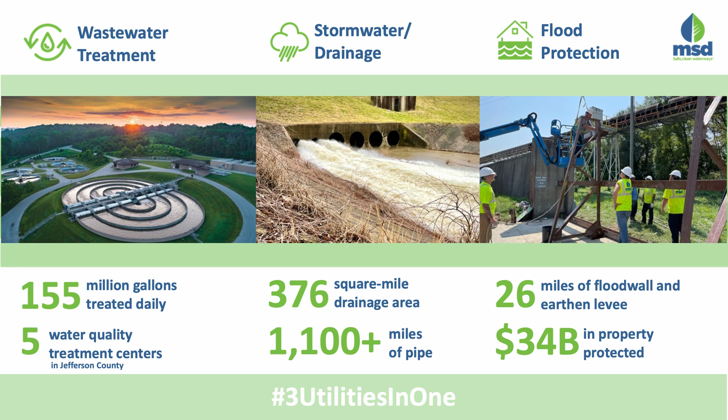For flood protection, we manage 26 miles of earthen levee along the Ohio River, and 16 major flood pump stations. We are currently trying to replace those 16 flood pump stations, and a lot of work has already started at the Paddy's Run flood pump station here in West Louisville, a $230 million project that is just now under construction.

During tonight's presentation, you have a couple of opportunities to participate. You can submit a report of an odor in your community, or if you have a specific issue, you can let us know about it using the blue form that was given out to you. We have a team of folks here to have this discussion with you, answer your questions, or assist you.

If you have a question relative to odor and the information we are going to present tonight, you can submit that to our team as well using the green form. So you should have either a blue form or a green form depending on what you want to do. If you just want to report an odor, you have the blue card. If you want to ask a question relative to odor or what we present tonight, you should have a green card.

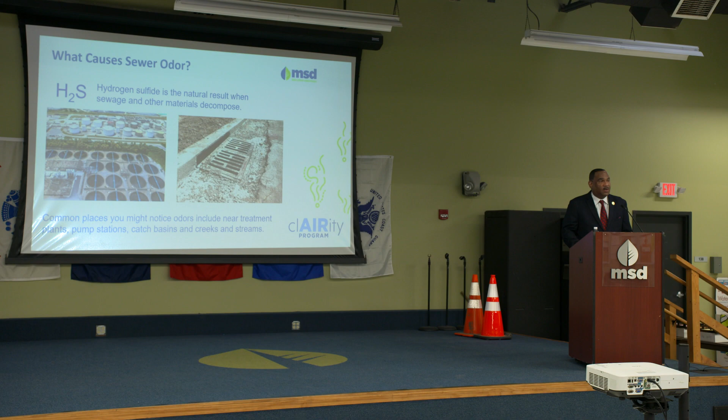So I want to talk about our industry, what causes odors in a sewer system. One of the most prominent odors that comes out of the sewer system is called hydrogen sulfide. Hydrogen sulfide is the natural result when sewage or other materials decompose in the system.

Common places where you may notice odors: it may be near a treatment plant, near a pump station, or near what we call catch basins—we'll talk a lot about catch basins in a minute—or near creeks or streams.

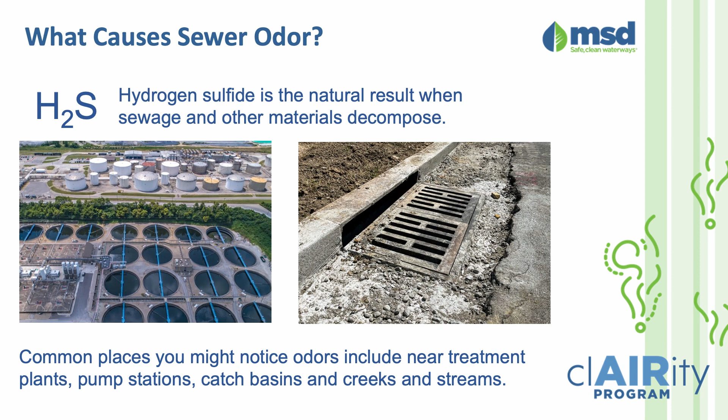We can only talk to you about what we know, and we know that we are not the only odor in town. We know there's a lot of odors in our city, but anything relative to the sewer system, we know what it is and how to respond to it. But we do not know how to address odors that may be coming from a manufacturing facility, an industrial plant, or a restaurant or something like that.

So when we get information from you that there's odors, we need to know as much specifics as we can so that we can identify where that odor is coming from.

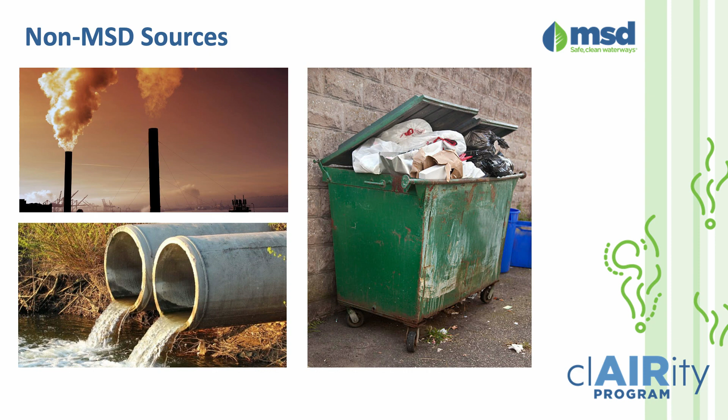We do know that there are what we call non-MSD sources of odors, and we work every day to address those within our system. We also know that there are private industries that contribute to odor as well, and as we control what comes into the sewer system, we also work with our industries to try to control what's being discharged into the public sewer system.

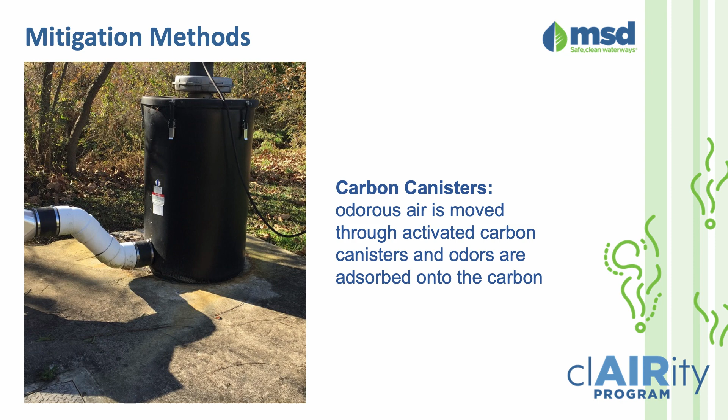We use a variety of methods to mitigate odors in and around our facilities. For small air streams, we use what's shown on this slide, called a carbon canister, usually installed on manholes or pressure relief valves when there are odors from those areas. These are mostly at our smaller pump stations, used to hold onto the odor-causing compounds as air streams through them, mitigating odors locally at certain parts of the system.

At some of our larger pump stations in the collection system, we use chemicals to prevent odors.

A common remedy that we use in our pump stations is called bioxide, a non-hazardous chemical that is commonly added to wastewater for odor control. It also creates an opportunity for the bacteria in the waste stream to thrive, so that it is actively consuming and dissolving odors.

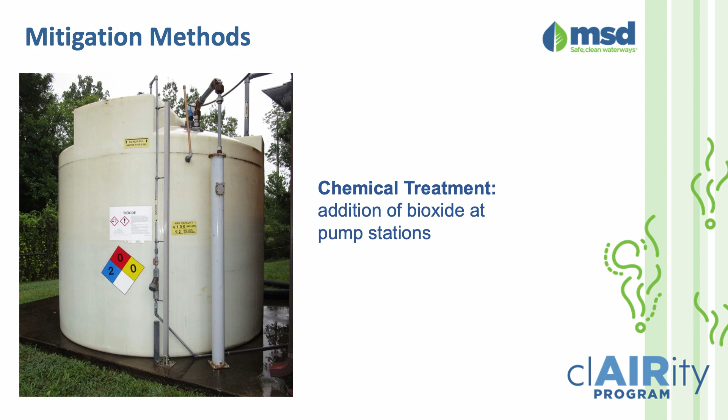One thing I'll say about some of the chemical treatment we do in our system is that it is very expensive. We're looking at how we can not only improve or expand the number of chemical additions in our system, but also other remedies throughout the system.

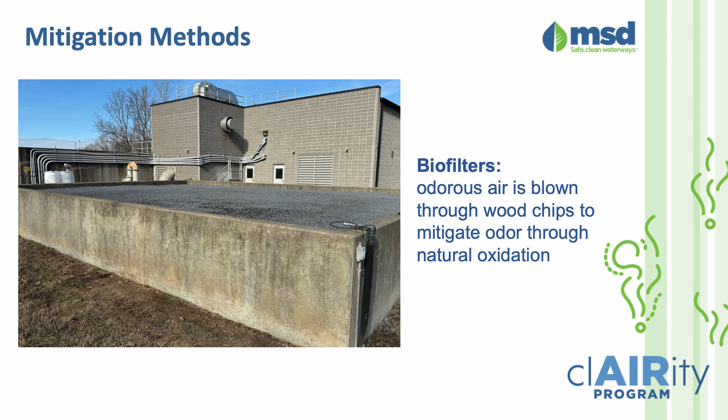Other mitigation methods are what we call biofilters. Biofilters are a very simple treatment process where we exhaust the air through wood chips or large pieces of mulch. As the air goes through those pieces of mulch, the bacteria that's created there consume the odor compounds coming off of such a facility.

We also use biological scrubbers. These are very large systems that we use, and they're very complicated and expensive to operate. There are a lot more moving parts than biofilters and other things involved, because inside the vessels, in the bed of media and living on the media, we have other compounds that help absorb the odors as part of the odor treatment process.

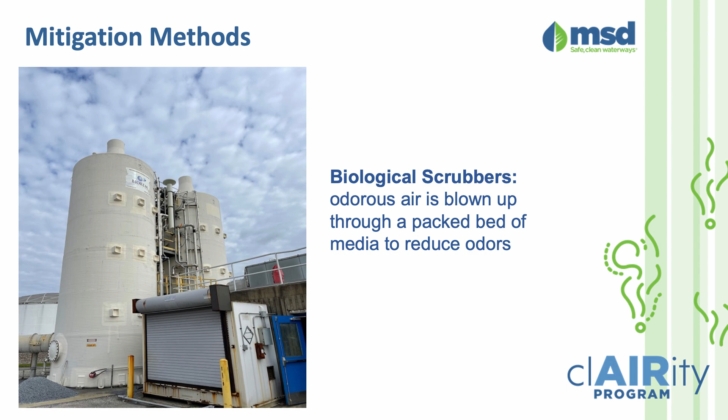So you've got 3 or 4 different methods that we are using currently with our operations every day. Whenever we identify issues, there's the use of chemical treatment as part of our collection system to help reduce the amount of odors that can generate within the sewer system. So when people say, well, what are you doing? This is the stuff that we're already doing, the stuff we do every day.

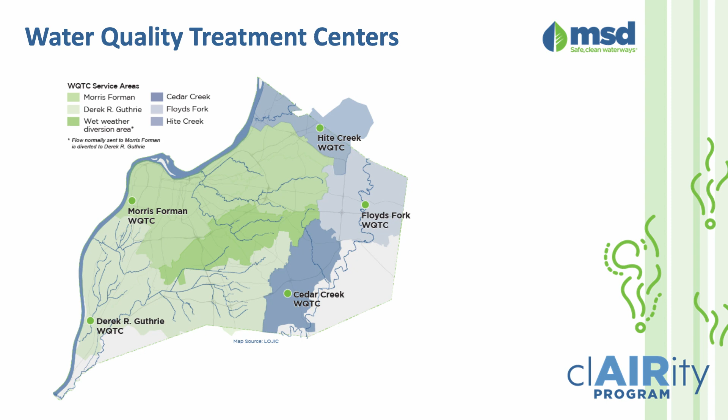We talked about the treatment plants. In Louisville and Jefferson County, we have 5 major treatment plants and 5 different watersheds. The Morris Forman treatment plant here in the West End is the largest watershed we serve in Jefferson County. It has a facility that was built in 1958, the largest and oldest in the state of Kentucky. On a normal dry day like today, we treat about 90 million gallons a day, and during a rainy period, we can treat up to 350 million gallons a day, almost 4 times the average daily dry weather flow.

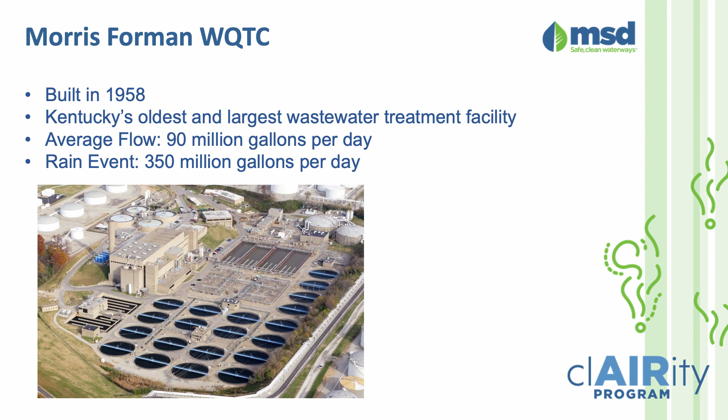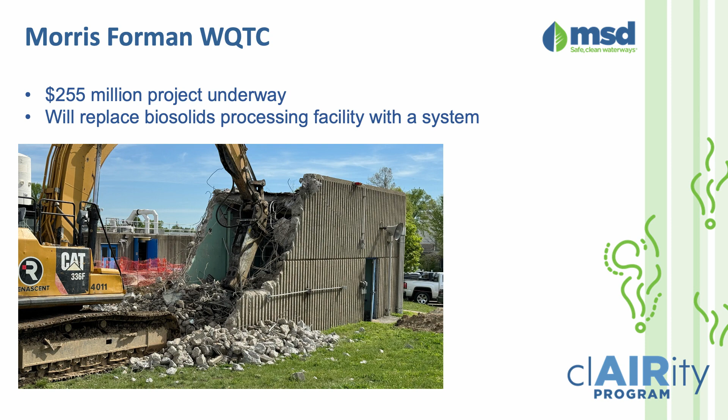At Morris Forman, we have already initiated construction to replace our biosolids handling system. That is a $255 million project, and as part of the scope of that project, there's approximately $12 million allocated to odor improvements on the Morris Forman property. That project is a design-build project, and it will take some time to complete, but it's already in our budget, already initiated, and expected to be completed by the end of 2026. That's how complicated that project is, but it has scope specific to odor reduction at the Morris Forman treatment plant.

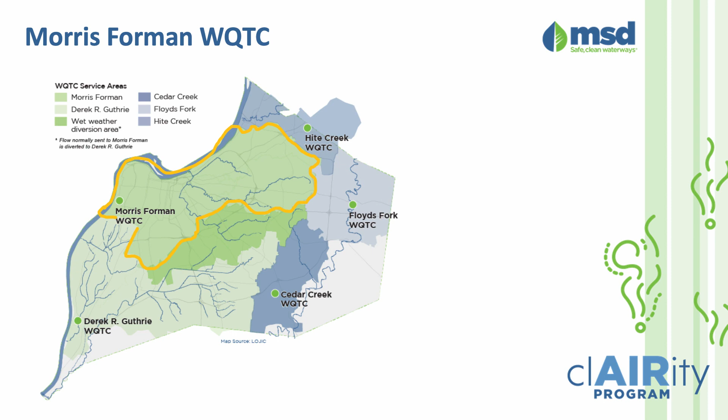When we talk about a combined sewer system and the rainwater, that rain or drainage enters into the system through what we call a catch basin. The catch basins were designed to take on rain during a rain event, and as that goes in there, the way they were designed at the time, if the rain event was too much, the sewer would overflow.

We had designed overflows in the system, which we are currently under federal order to eliminate because of the change in the Federal Clean Water Act. So we have spent well over $1 billion eliminating overflows in the combined sewer system, and we just completed our last combined sewer overflow project. You probably heard us talk about a deep tunnel that ran from downtown Louisville out to I-64 in Grinstead. That was a $230 million deep tunnel project that we just completed.

Now our focus is on doing the work within the existing system, at our treatment plants, and at our pump stations. 85% of our current CIP, our capital improvement budget, is tied up in existing federal consent decrees or state agreed orders to address either upgrading the system or coming into compliance with the Clean Water Act. So think about that - 85% is already allocated. It doesn't leave very many residual funds for us to deal with immediate needs or emergency needs in our system.

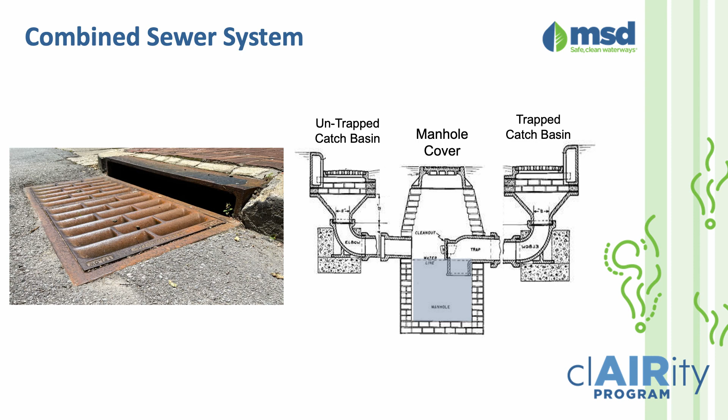What a catch basin does is it basically takes on this flow, and you can see there are two types of catch basins - some designed with what we call a trapped mechanism and some that are untrapped. Inside the 264 loop, we have about 20,000 catch basins, and about 12,000 of them, back when they were installed, were untrapped. When a catch basin is trapped, there is a water line in the catch basin. The water line prevents odors from coming out of the sewer system and out the catch basin. So out of the 20,000 inside the 264 loop, 12,000 of them are untrapped.

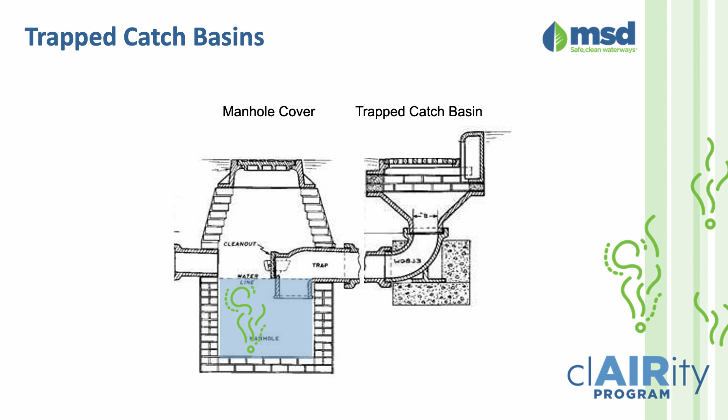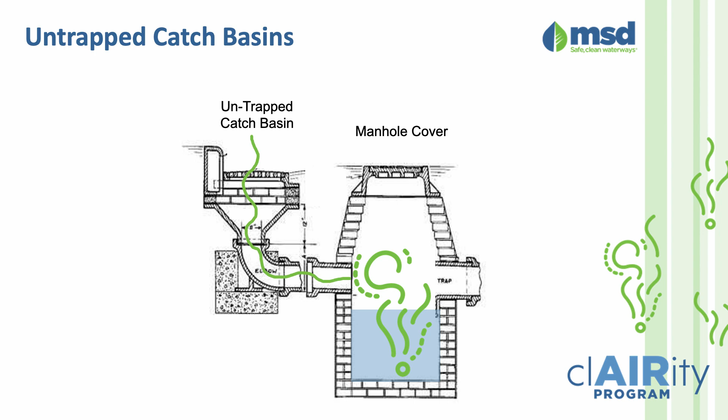So the odor stays in the system when you have a trapped catch basin. Fortunately, not all 20,000 of them are untrapped, so we're able to go through now and inspect and assess those that need either replacement or upgrading to make sure they are trapped, so odor cannot get out through a catch basin. An untrapped catch basin does not have the ability to have a water line within it to keep the odors from leaving the system.

So what we have to do is go in, and when we get a call, our crews - a lot of them are standing out here amongst you today, Tony Woods is one of them, throw up your hand Tony - Tony and others respond, and the first thing they do is figure out where the odor is coming from.

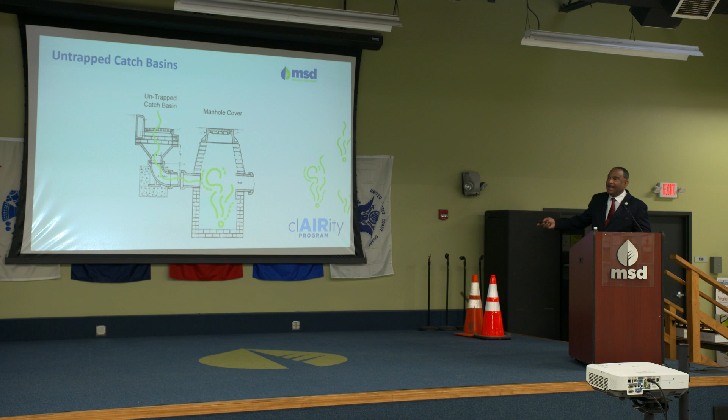And if it's coming from a catch basin, and they figure out that it's untrapped, the first thing we try to do is get water into the system. We try to get water into the catch basin, or we flush the system, and then secondly we deodorize that system. That's what our crews are doing every single day during the summer, particularly during a long, hot, dry period. So when people ask us what we're doing, these are the type of things we're doing - we're responding, and we're either flushing or deodorizing these systems.

I talked about rainfall, and this is fact - we have experienced a long period of drought, and I just saw a news report yesterday that this summer is expected to be a long, dry, hot summer. That's not good news for us because we know there's going to be challenges if we're not getting the rain that we need to flush out those combined sewer systems.

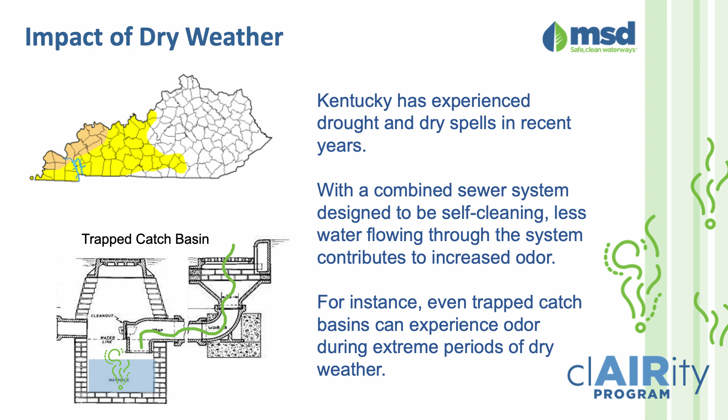With the combined sewer system, if it was designed in the 1800s to be self-cleaning and you're not getting the rain to flush it out, you have that residue within the system that is decomposing, and that's what generates what we call H2S. Ultimately, without the trapped catch basins, that's one part of the system where odors are getting out, and that's why we've put so much focus on that. We know particularly in areas where we have hotspot areas or complaints, we need to assess the catch basins first, and we need to make sure we have those conversations.

We need to make sure specifically from the community, what are you smelling? Because once we know what you're smelling, we can determine where that odor is coming from, whether it's coming from outside or from inside—there's also internal plumbing issues we need to talk to you about as well.

What our crews do, in addition to flushing the system through with our existing Vactor trucks, is partner with the Louisville Water Company. When they flush fire hydrants, we coordinate with them to make sure they are flushing those hydrants in parts of the city where we are getting odor complaints.

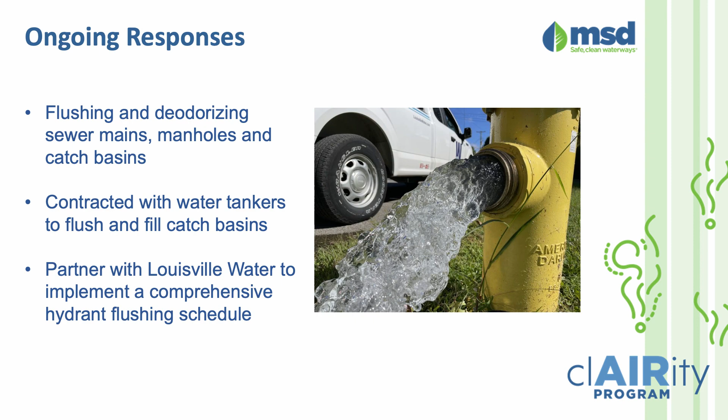Secondly, we contracted last year with water truck tankers so we could direct and send water trucks and tankers into areas to introduce and get water into the system. We're going to do that again this summer. In fact, we're getting ready to do a bid to contract with more providers to help us get water into the system. Also know that we're not getting the flow from normal residents and businesses as we did.

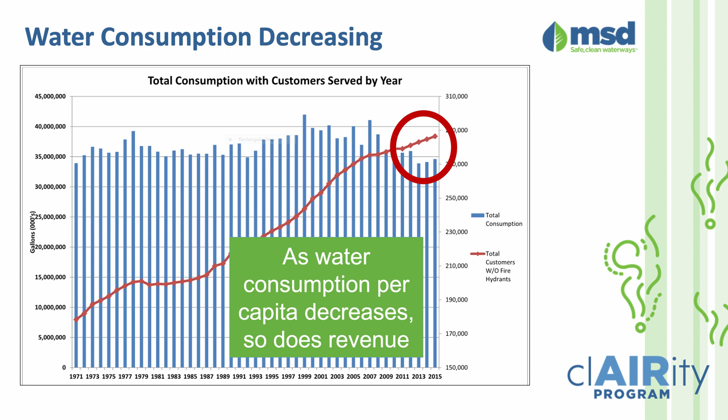This graph shows that even though the population of our city is almost 2 to 3 times higher than it was in 1960, the blue line shows the total consumption on an annual basis. You can look at 1971 versus 2015—even though the population has increased 2 or 3 times, we're not getting that additional flow with the growth of our city. So with a combined sewer system, even though the city is bigger, we're not getting the flow from residents and industry, and we're not getting the rain we would normally get to flush the system.

We have a double-edged sword: we are not getting the flow to flush the system out, particularly during dry, hot summer periods. And that, my friends, is the primary contributor to why you have odors in the streets and in the collection system—the lack of water usage and the lack of rain. That's factual. No matter how anybody else wants to spin it, that's factual.

We've had folks tell us, why can't you just have the water company flow more water into the system? Or why can't you just put a pump in the Ohio River and put water in the system? We have 20,000 different catch basins inside the 264, and 50,000 manholes across Jefferson County. You would spend more money building a system to pump water from the Ohio River to address odors than you would doing what we are doing right now. So we have to be rational and factual about what the issues are, and what the short-term and long-term fixes are.

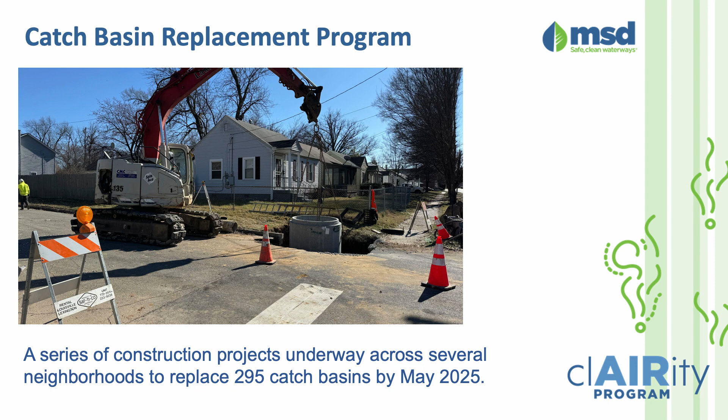When we talk about our catch basin replacement program, we already have a series of construction projects underway across several neighborhoods. So far we have 295 catch basins that will be done by May of 2025, and the majority of those that have already initiated construction are wrapping up this May.

In the Shawnee neighborhood, we actually had to rebid that project three times to get bidders, and we had to package those together to get a bid. But now that we have bids, that work will be wrapping up in the fall of 2024. We have identified and assessed every catch basin in all the neighborhoods. We still have some work to do in the Russell neighborhood, for example, where we estimate it could cost $15 million just to replace the catch basins there.

So what we've identified so far in a preliminary budget is work that we know we can do over the next 2 to 3 fiscal years, and that is estimated at about $48 million. Currently, we don't have that money in our budget. So next month, I've got to have conversations with my board to prioritize and set up funding for fiscal year 25, 26, and 27.

And that is in addition to all the work we're already doing at Morris Forman, in addition to the work at the Shawnee Basin, in addition to all the work we've started at our pump stations, and the work we're getting ready to do increasing chemical addition into our system.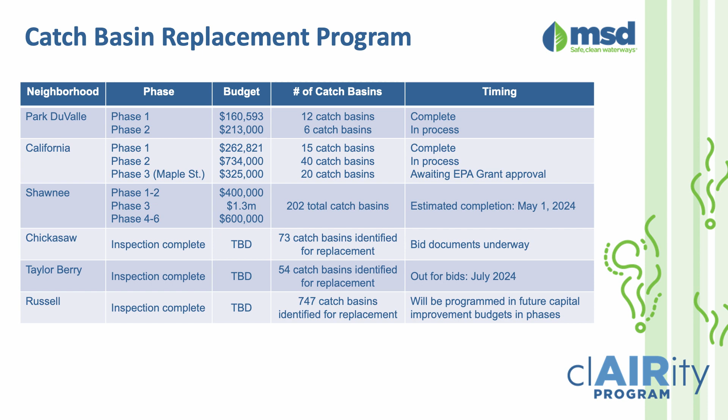And in the Russell neighborhood, inspection has been completed, and as I mentioned before, we are going to have to figure out how we program the improvements there. We have other areas that need to be assessed: parts of the downtown business district, parts of Taylor Berry, parts of Park Hill, and a lot of other communities where we need to do these inspections and assessments. But this just shows you the work that's going on now and all the work being programmed in, and again, how do we budget that and get it into our cycle over the next fiscal years?

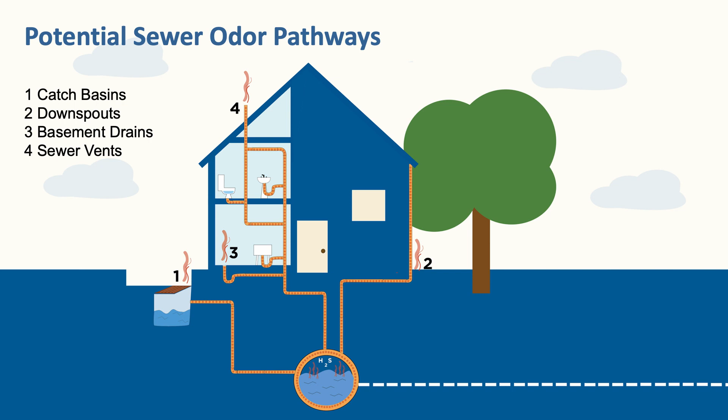There are different ways odors can emanate into the air. We know catch basins are one, manholes another, but we also know that in some areas, downspouts connected to the system can also be a source for odor pathways. We also know some people say it's inside my home, coming from my basement trap. Those are areas where we tell folks you can do things to trap your basement drain so odors do not come into your home, and also address sewer vents on homes.

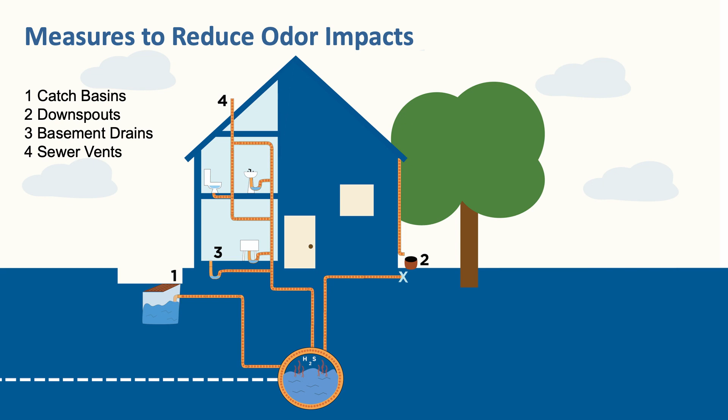So particularly with roof drains, our recommendation is that you do not have a roof drain connected directly to the sewer. You can disconnect those and apply remedies, and also set up rain barrels, et cetera, to deal with the roof drains. But all of these are potential pathways for odors to be in the system.

A couple of years ago, we created a public information campaign. We did a PSA, and we are going to refresh that PSA and run it now as part of what we call our clAIRity program. It's really trying to get information out so we could raise awareness, so that if people have odor complaints, they can notify us and let us know so we can be responsive.

That campaign was, if you smell something, say something. And we believe that that has been very beneficial to the community. We also know it's been very beneficial to us, because when we do get those complaints, now we know where they are, and we can trigger and assess and figure out how we address those in the community.

All this information about clAIRity in terms of how you can access information, you can go to louisvillemsd.org/odor, or you can call 540-6000 and put in a complaint about an odor as well. Again, all that information is available for our team to address with you tonight.

That's the type of information that we want to be able to get out in these public meetings, but we also want to take the opportunity if folks need more information or have questions. If you have a blue card or a green card, you can submit your question and we can try to address them while our staff is here. Or if there is a need for a more private conversation with our team, we have the ability to have a breakout room.